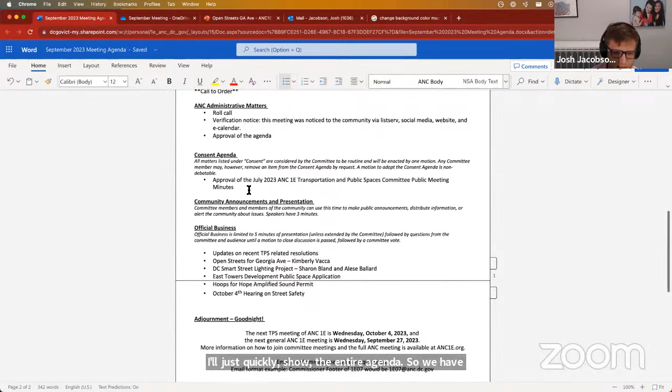I'll just quickly show the entire agenda. So we have the consent agenda for just the meeting minutes from July. Several items under official business around our past resolutions. A great presentation on open streets. We'll be learning more about the DC Smart Street Lighting Project, the East Towers Development Public Space application, and also Hoops for Hope amplified sound permits. And then if time allows, since we have a lot on the agenda, there's a street safety hearing on October 4th and we wanted to see about putting together testimony for that.

And then we are good to go. So I will make a motion with unanimous consent to adopt the agenda. If there's any dissent, please state so now. Otherwise, we'll just go ahead and approve it. Hearing no dissent, the motion is approved.

Next up is the consent agenda. Just a reminder that all matters listed under consent are considered by our committee to be routine and enacted in one motion. I will now make a motion with unanimous consent to adopt the consent agenda. Hearing no dissent, the motion is approved.

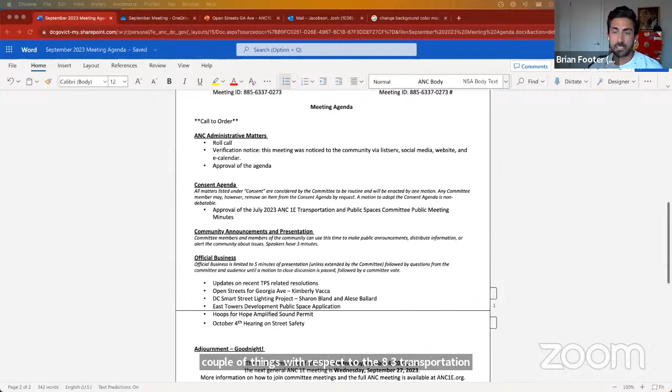Making some great movement and headway with DPW and DDOT. A couple of things we need to follow up on because there might have been a miscommunication on who has responsibility over it, specifically around picking up a couple pieces of illegal trash and placement of trash bins, but making good headway on turning 8th Street and Barry Place into a 3-way stop, and talking to the different developers about 1-way versus 2-way parking around the neighborhood with the 3 different buildings that are coming up.

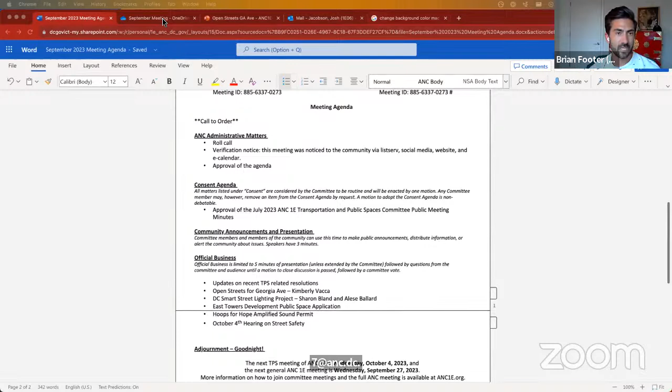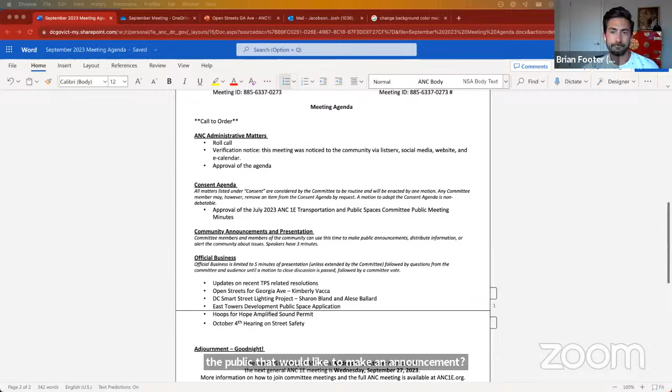Next up is official business. I will just briefly touch on our TPS related resolutions from our July meeting, and then we'll hear a presentation from Kimberly Vacca from DDOT.

Just really quick, the ANC passed the 2 resolutions that the TPS committee passed back in July. That was a resolution calling for a task force to boot and tow frequently speeding cars. That was passed, I think 7-0-0, so it was unanimous, or at least I don't remember the exact final vote count. And then the public space permits with our caveats for the Howard Lot 3 residential project also passed through the full ANC and was sent along to DDOT.

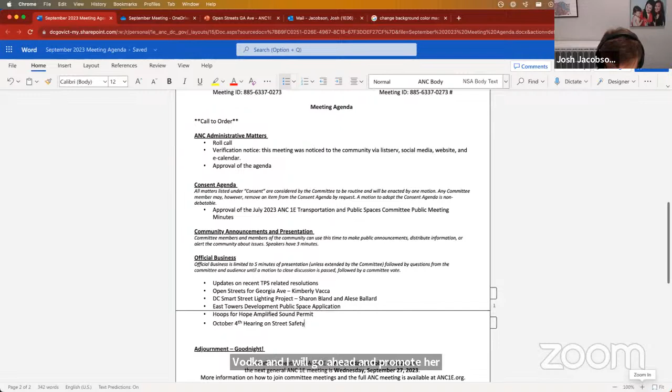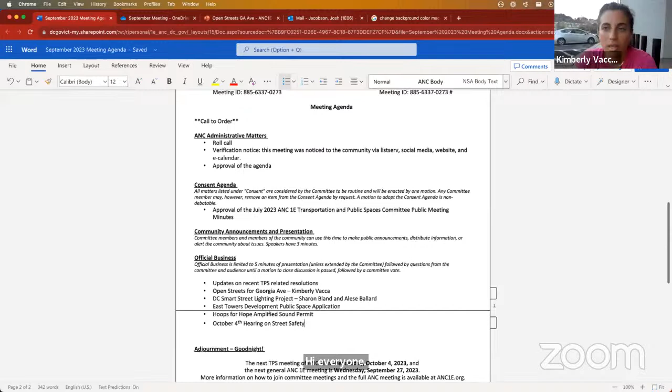Hi everyone. Hello, would you like me to share the presentation? I think you mentioned you might not have great Wi-Fi. I can actually do it. Oh cool, thank you so much, I was trying to be prepared just in case. I'm at a pickleball tournament, so I love being outdoors as Open Streets, it just spreads into my personal life too.

Okay, I'm going to share my screen because I have a quick presentation together for everyone. Can everyone see this? Great, okay, I have 5 minutes so I'm just going to breeze through everything.

This is not our first time coming to your community and neighborhood, but I know many people may not know what Open Streets is. I'm Kimberly Vacca, a transportation planner at the District Department of Transportation. I'm also our public space activation coordinator, so I do everything related to streeteries, parking day, parklets, but most importantly today, Open Streets. This year we've partnered with Nedium Consultants, our event planner who helps with all the event logistics of running an event such as Open Streets, which is very unique. They will be on the ground with us to facilitate all things Open Streets.

For those who may not know, this is not new to the world. It actually began in 1970 in Bogota, Colombia through Ciclovia, but we've brought it to DC and deemed it Open Streets. Essentially it seeks to reimagine streets to prioritize people over cars. So we close 3 miles of Georgia Avenue to vehicles and open it up to people to safely walk, bike, skate, scoot, learn about transportation safety from professionals at DDOT, WMATA, WABA, and participate in a range of fun and family-friendly activities, and also support local businesses on the route. Unlike an H Street Festival or an Adams Morgan Day, which brings in outside vendors, we do not allow that. We only allow businesses on the route to participate in Open Streets to help promote them to event attendees.

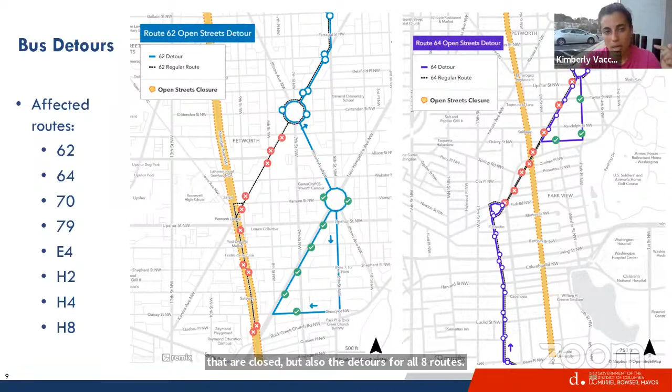On our website, which I'll show at the end, we have posted all of the affected bus routes. There are 8 routes that are affected, showing the stops that are closed, but also the detours for all 8 routes. You can go to the Georgia Avenue page and click on whichever bus route you're interested in learning more about. We also have our vehicle detours posted.

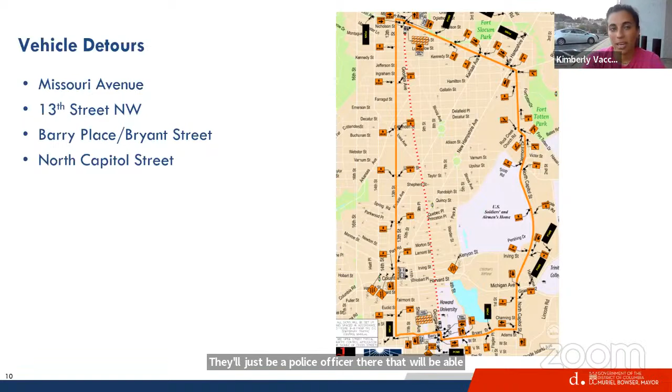This is the same as years before, where traffic will be diverted from Georgia to Missouri, 13th Street, Barry Place, and Bryant Street at the southern end, and then North Capitol Street to the east. Cars will not be able to cross Georgia Avenue at all at any section, so you have to go all the way around. But if you live in the blocks immediately adjacent to the route, you will be able to access your home. There'll just be a police officer there that will let you through. So please, if you're driving that day, note these detours and plan in advance. We also share this with Google, Waze, and Apple Maps and things like that, so they can integrate it into their systems.

Some expected programming you can expect to see this year are bike maintenance and safety riding lessons, live music with a go-go band, a pop-up pickleball court, Foamboree, which is a classic we started last year and has been a hit ever since, free fitness and yoga classes, roller skating lessons, arts and crafts, a kids zone at Bruce Monroe Park facilitated through DPR, hula hoop instructions, rest areas, and a whole lot more. We have a major announcement coming this year for programming that is expected to be released next week.

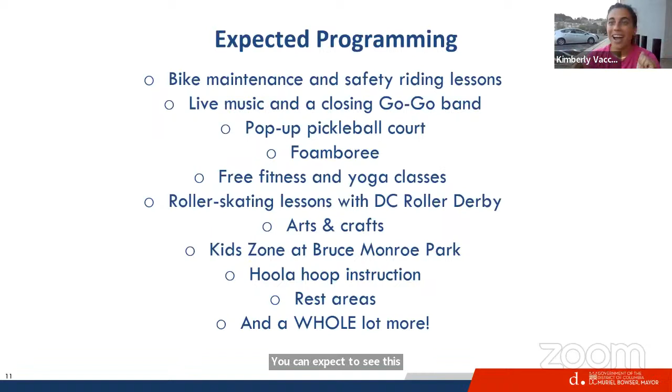I will send it out to all the ANCs once it's live, but I'm really excited about this announcement. It's going to be something we've never done before, so just want to pique your interest a little bit. If you have any questions, feel free to reach out to me directly or to our email at openstreets@dc.gov. All information about the event will be posted to our website, www.openstreets.dc.gov. That's it, thank you so much.

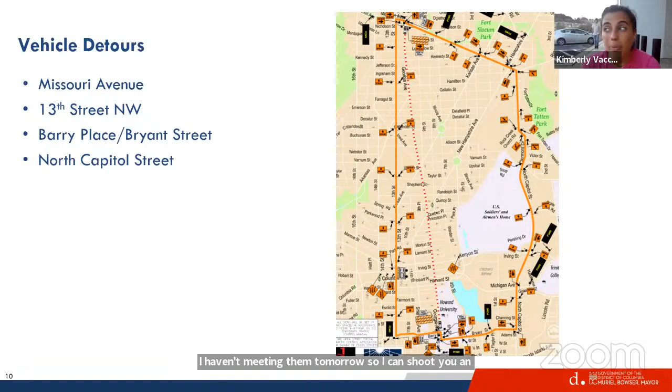Great question. I believe they typically just say that they live there, and MPD usually lets them through. They might just ask, what's your address, and provide it. I honestly don't know, but I can follow up with MPD. I have a meeting with them tomorrow, so I can shoot you an email to confirm. We've never had a problem with that in the past, but I can get the details.

Awesome, and then the cleanup plans for after the event? Yes, we have volunteers coming to help us clear everything out of the roadway. We also have DPW scheduled for street cleaning services after. They come before the event to clear all the trash and clean the streets, and then they come after to do the same. Awesome, that's it, thank you. Thank you.

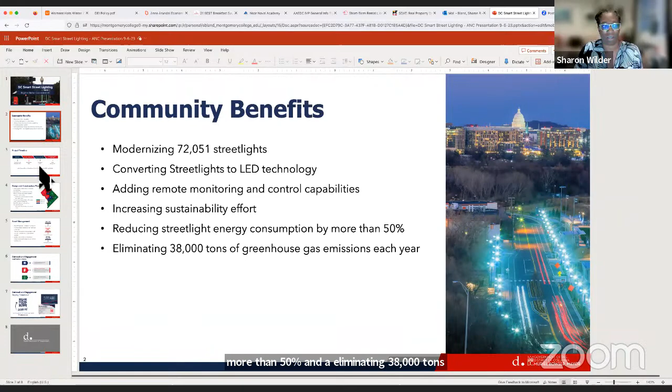Our project timeline: we started rehab work in the first quarter of this year, then moved into conversion work. Rehab is making sure the poles and everything are able to sustain the lights that we then convert, and we've been doing conversion work ever since.

We also at the same time launched our asset management, where we get the call to replace lights, what have you, and manage that asset.

In our design and construction phase, as you can see, we started with group 1, which was wards 5, 7, and 8. We are working on the next phases of our work upcoming. Our tasks include detailed design, procurement, and mobilization.

Our rehab work, as I mentioned earlier, is sporadic work to upgrade foundations, poles, and make sure the arms are in good condition. This will also happen sequentially per groups of wards.

Our conversion work, which is the actual installation of the lights, occurs per groups of wards, and then they are split per ANC, which is why we wanted to make sure we spoke with each single ANC single member district. Each ANC is split into bundles, with less than 5 bundles per ANC, and work within a bundle will not last more than 14 days. We're going to be in, we're going to be out.

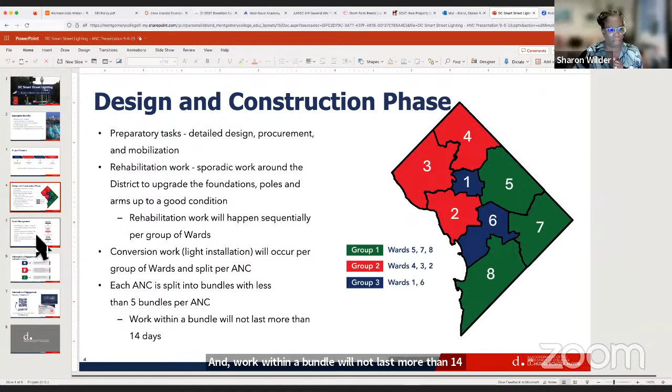With regard to our asset management, it's basically streetlight maintenance. That preliminary asset management service began last fall, and the full asset management service began in the first quarter of 2023. We'll continue as LED lights become available. By May, we're expecting all new LED lights to be installed, and then we'll continue with the asset management portion of this work.

Outreach and engagement has been that we notify each ANC by mail, by email, 45 days prior to the start of work. Then 7 days prior, we make sure we leave door hangers for residents, and information cards with businesses providing notice of upcoming work and advising of no emergency, no parking. This will include a range of durations for the work on these materials.

So we'll say it'll be 3 days we expect to work, or a week or 14 days. And then 72 hours prior to the start of work, we'll be hanging those emergency no parking signs.

So how do you stay connected? Well, you can scan here to view our website and to view the project FAQs. We do have our own website, streetlights.dc.gov. There are places to plug in if you're media, or just if you want to receive project updates. And certainly connect with us on Facebook and Instagram.

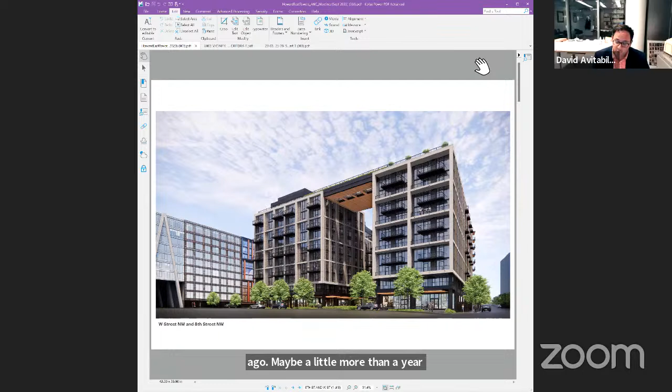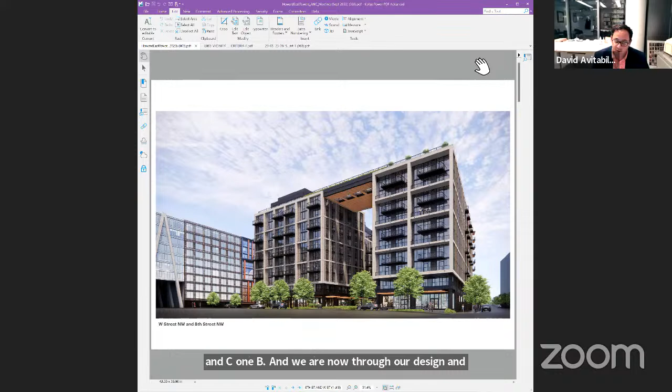We are now through our design and going in for our public space permits, so we wanted to share an update on the design and some specific features of the public realm that we're proposing.

So this is a shot of the building from the south looking north. It is primarily an apartment building with about 504 units, 10 stories plus a habitable penthouse. There's also about 15,000 square feet of retail on the ground floor, and it has underground parking and bike parking.

You will see how the circulation works around the site in some of the subsequent slides. I won't try to play architect and present the design, but I'll just briefly flip through a couple of images to give everyone a sense of what the building is on all four sides. So this is the south, looking north along W Street up towards the building.

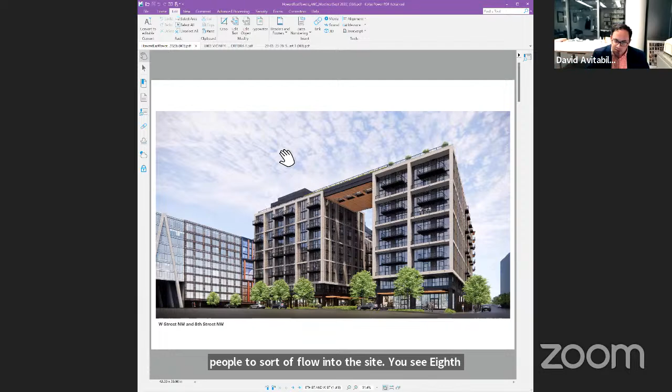You can see this is really the front of the building. There's a large courtyard that's created, and you'll see that in the site plans as well, that takes the property from W Street and allows people to flow into the site. You see 8th Street running up on the east side, and 9th Street running up on the west side of the building.

This is a view from the other side of W Street. You're now standing on 9th Street looking northeast, and again this gives you a sense of the building and how it sits relative to the surrounding buildings.

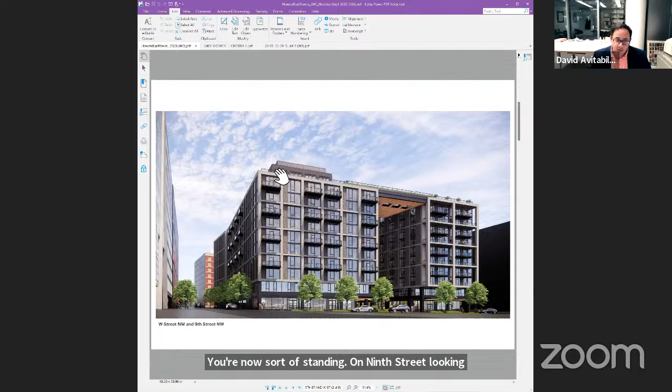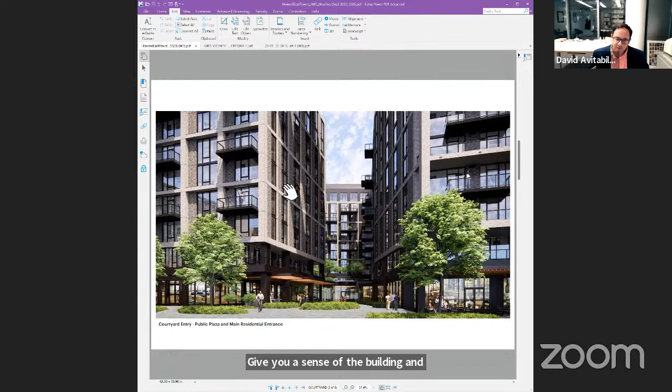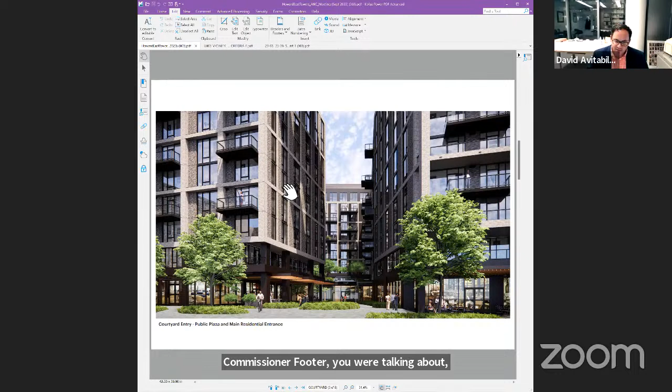Here's a view standing inside on W Street looking north directly into that courtyard to give you a sense of the building, and as you'll see in the site plans, they give a better sense of it. What we really tried to do is take this one block of W Street that Commissioner Footer, you were talking about just before on the streetlights, and make it a moment inside of this block and a little bit of a place of respite.

Here's a view from the north looking down 8th Street at the northeast corner of the building looking south. This gives you a sense of how the building fits up against the existing East Towers Residence Hall and how it ties into the overall feel and cadence of 8th Street going southward.

So here's a site plan of the building, and it gives you a sense of our overall orientation: W Street on the south, 9th Street on the west, 8th Street on the east, and Bryant Street on the north. I wanted to note a couple of things here, all of which show the ways in which this building and development is trying to really enhance the public realm. The first is you see along the south, the building itself is set back somewhat significantly from the sidewalk and the property line along W Street.

There's this building restriction line that was created to really make sure that there's this width inside the center of this large block of properties around us, so that there's open space created that we're able to populate with a mix of planting and plaza to enhance the public realm.

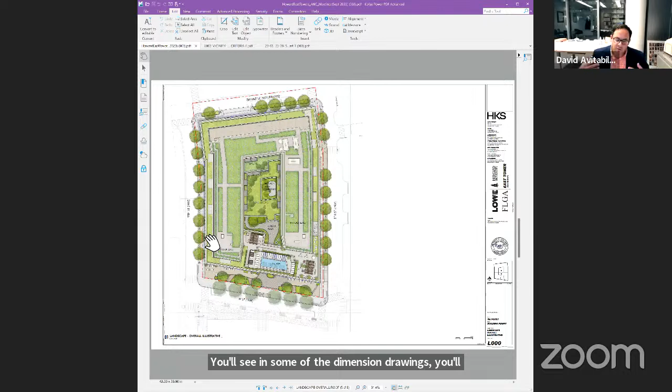You can also see on both 9th Street and 8th Street, our west and east sides, the buildings pulled back from the red dashed property line. We voluntarily set back the building a few feet, which allows us to create wider sidewalks with street trees. You'll see in the dimension drawings typical 5-foot tree boxes and 8-foot wide clear sidewalks.

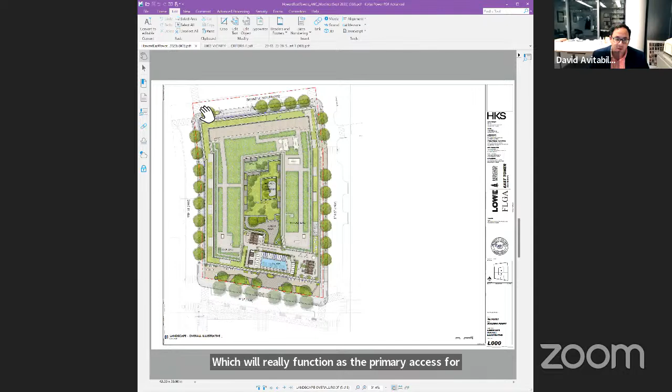So we're deliberately creating a more engaging public realm around the site and a more comfortable realm for pedestrians. On the north side, we're creating this new segment of Bryant Street that'll extend 1 block further east from where it is now, which will function as the primary access for loading and service to the building, but also provide a connection between 8th and 9th Street. I think that's important.

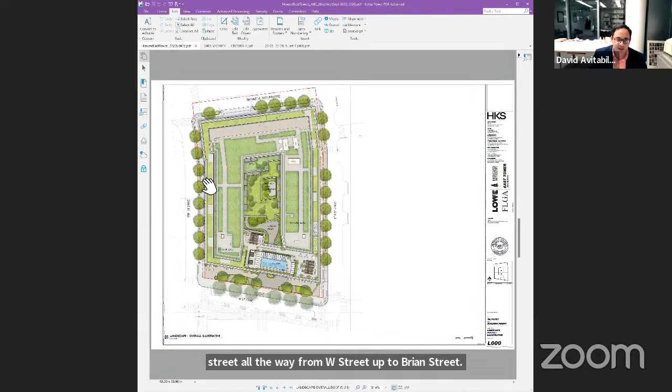One other thing I wanted to note regarding 9th Street: right now our lot actually includes the northern half of this block of 9th Street. When we closed the alley, we gave back the land that is currently that northern portion of 9th Street. So 9th Street will become a full, city-owned, dedicated and accepted public street all the way from W Street up to Bryant Street. We actually ended up giving more land than we were getting through the alley closing.

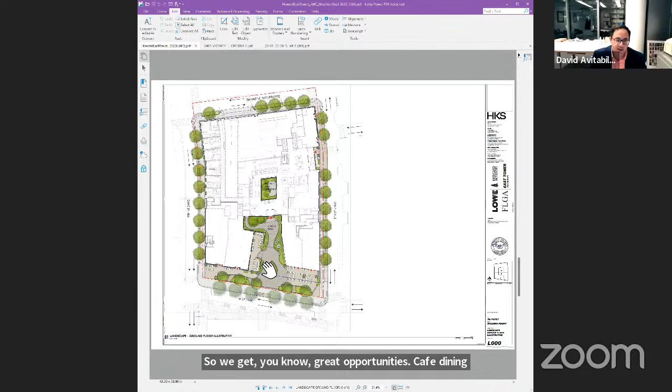The primary retail spaces are concentrated to the south along W Street, so we get great opportunities for cafe dining and seating, both within that building restriction area and on our private property. You see again the setbacks to widen the sidewalks on both sides as well here.

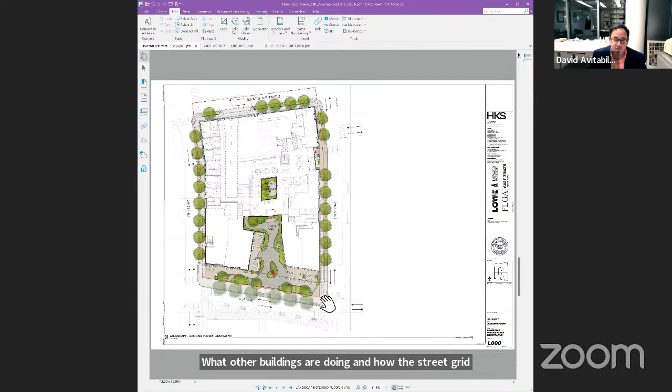We've also included here what we know from our surrounding development, what other buildings are doing and how the street grid will work. So you see Bryant Street's 2-way, 8th Street is 2-way, W Street's 2-way, 9th Street is 1-way southbound. You can also see, and I think we took this in part from coordination with the other teams, where the anticipated parking areas are contemplated on the east side of 8th Street.

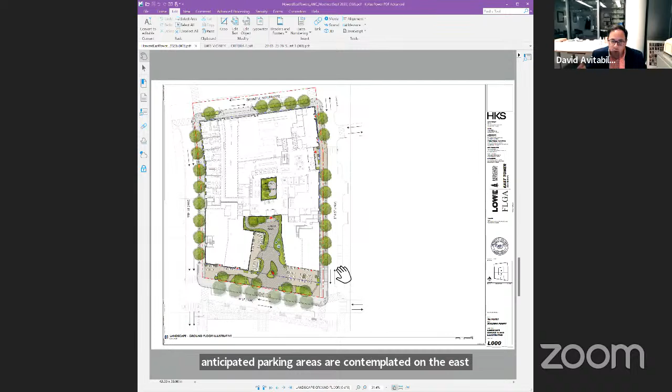Both 8th and 9th Streets are really narrow rights of way, so there's very limited space to create room for vehicles and parking and wide sidewalks and everything else we want to see. These aren't like downtown rights of way where you have 90 feet to work with. We've got 40 or 50 feet, but between setting back our building and being strategic about what happens where, we can balance the interests around the site.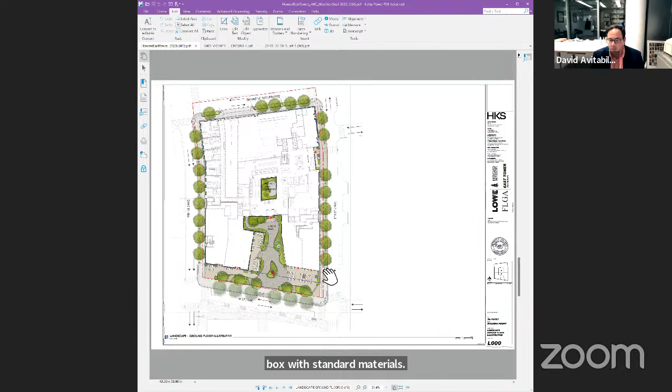For the most part, this public space is pretty standard DDOT fare, standard widths, standard tree box widths, standard materials. But there is one area where we're deviating from the strict requirements, and one of our asks is for approval of this. This is actually for the balconies on the building that project out.

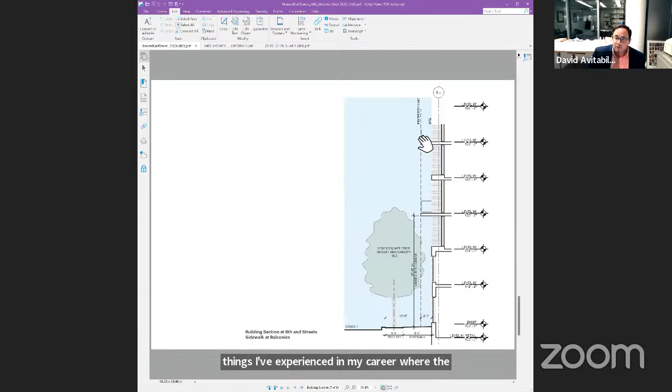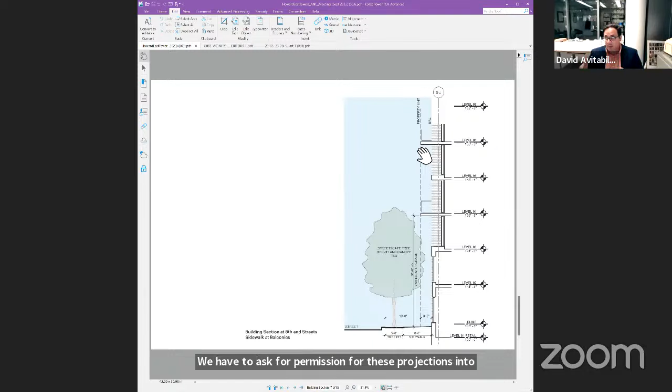This is one of the odder things I've experienced in my career, where the balconies are located fully within our private property. They only come out to the property line, about 3 feet projecting from the building. But because we agreed as part of that voluntary sidewalk setback to treat this area as if it's public space, we have to ask for permission for these projections, because you wouldn't ordinarily be allowed to have a balcony projecting onto a narrow right of way like this.

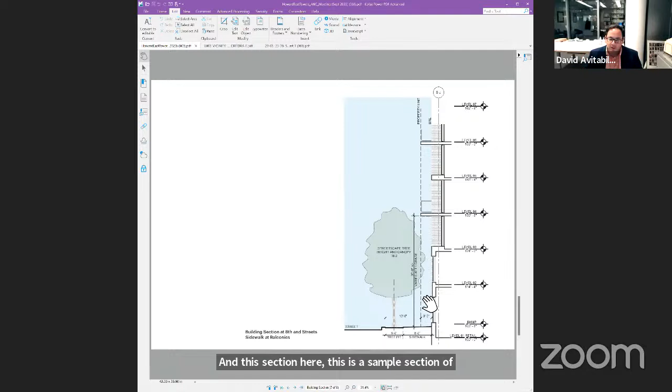We've worked closely with DDOT and the Office of Planning to plan how these would work. This section here, a sample section of 8th Street, gives you a sense of how this works and doesn't interfere with the public realm. We don't start the balconies until the 4th floor, so they're quite high above the sidewalk, and even pretty high above the anticipated tree canopy height of the nearby streets, and they're set back as well from those trees.

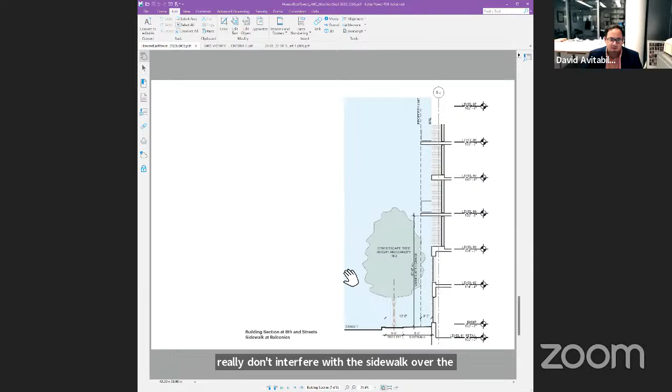The rest of it we expect will be relatively standard. Sort of wrap it up. We haven't yet filed our public space application. We anticipate doing that in the near future, but we thought it made sense to come to you all now to start the presentation and start discussing this with you all and get whatever feedback. So with that, I don't know if Lex or Fred have anything to add, but otherwise we'll stop here.

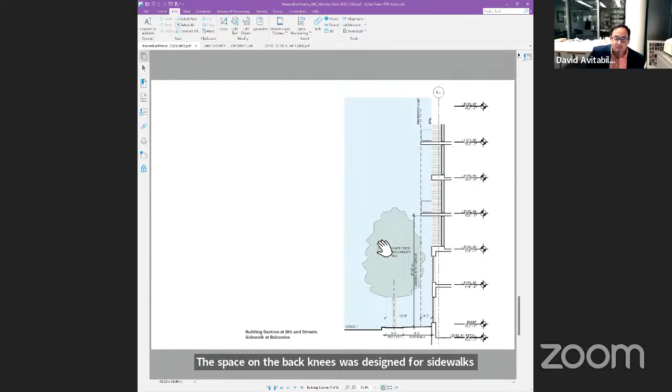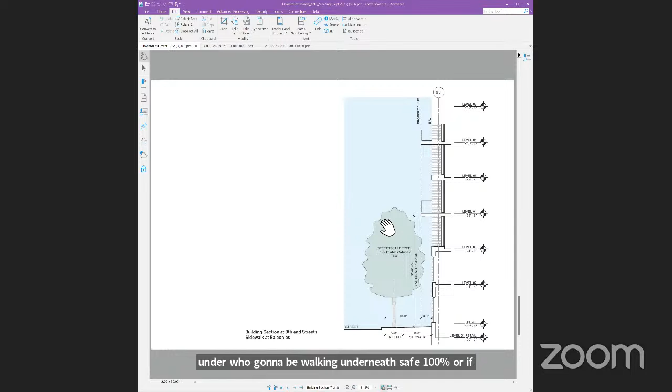Commissioner Lancaster, did you have a question? Yes, I just wasn't sure if I was good to go. My question is about the balconies. The space underneath the balconies was designed for sidewalks and people to walk, correct? Yes. Is there any policy or anything put in place to protect people who are walking under those balconies in case something falls or something happens in that area? Are the people who are going to be walking underneath safe 100%? Or if someone accidentally throws something over or something falls, what does that look like as far as policy and procedure?

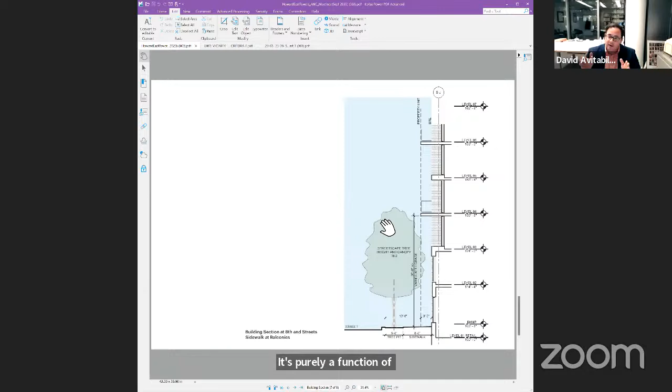So maybe I'll take a step back. Typically, you can have balconies projecting over a sidewalk. They're allowed in most situations, and you'll see them all over the city. In fact, on our W Street side of our building, we have them, and it's totally permitted by right. The only reason why we need to have a special ask here for the balconies is not related to the fact that they're projecting over the sidewalk or how high or low they are relative to the sidewalk. It's purely a function of when you have rights of way narrower than 60 feet, the default rules typically don't allow projections into the public right of way, because it's presumed that you might get too close to something like street trees.

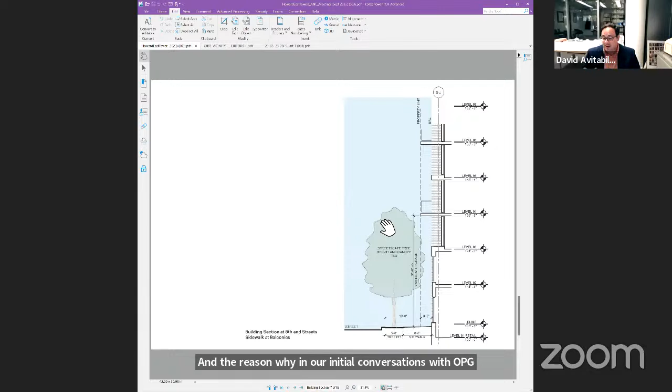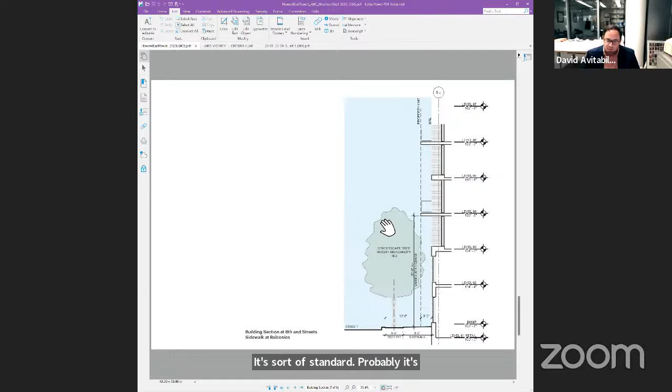The reason why in our initial conversations with OP and DDOT, they've said this appears to be fine here is because basically by voluntarily setting back the building, we've created that separation that they want to see. In terms of general rules and regulations around protection from what might fall from a balcony, it's sort of standard common law rules over what happens in terms of an act of potential negligence. But this is no different than any other balcony over any other sidewalk in the rest of the city in that context.

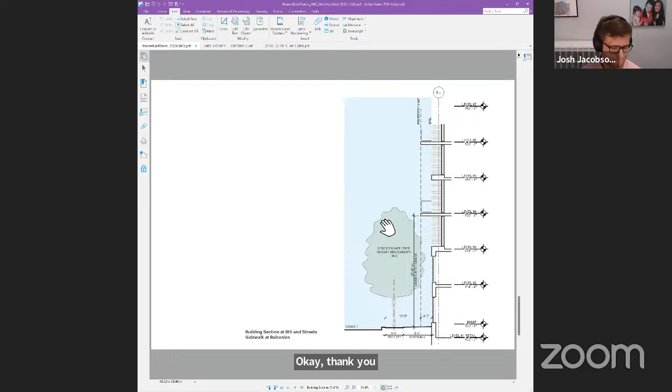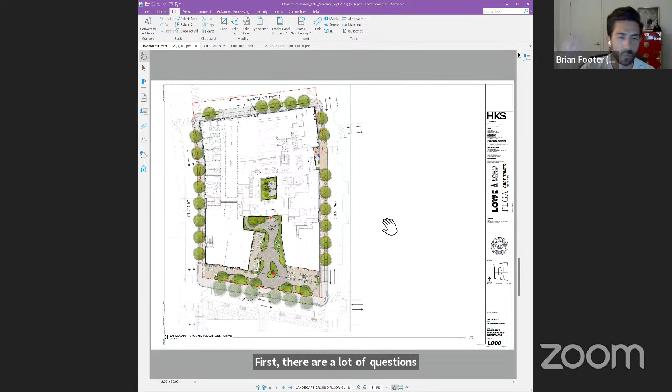First, there are a lot of questions from members of my community and my constituency about when this is going to start. So do you have a projection on when construction or breaking ground will start on the east lot, on this property itself? I'll look to Lex or Fred to answer that question if they've jumped up.

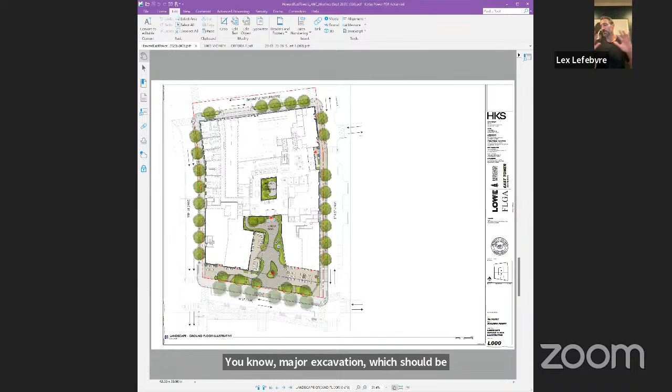Yeah, hey everyone, this is Lex. Sorry I was late, can you all hear me? Sorry, having some technical difficulties here. Right now we are targeting a mid to late January groundbreaking. I do want to note one wrinkle in that would be construction on major excavation, which would really be the start of having the site fully fenced off with construction entrances for excavating for the below grade parking. There is an early stage of work that you hopefully will see starting in October.

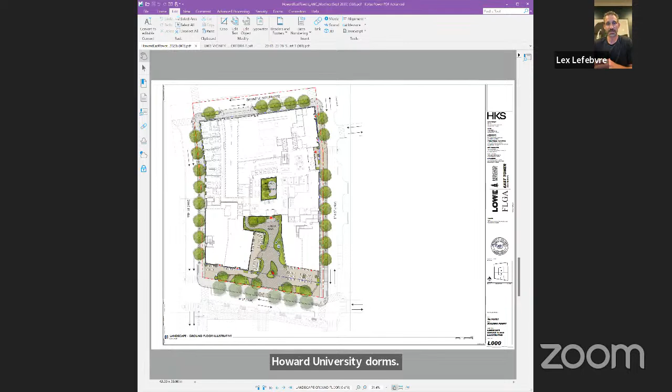That's going to be very limited to the north part of the site, up adjacent to the Howard University dorms. There are a couple of existing transformers you'll see on 8th Street right near the dorm parking garage entrance. Those two transformers power the dorms, and they have to be replaced and moved onto dorm property.

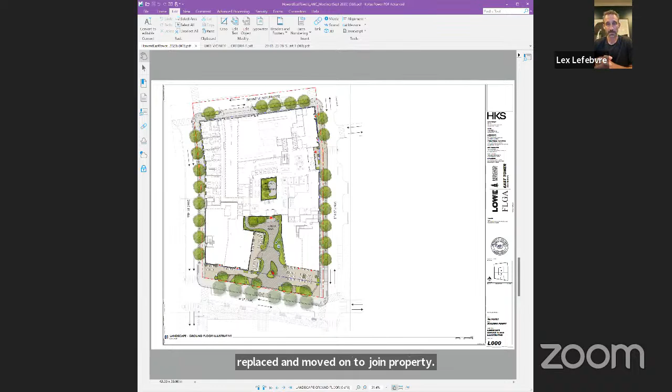That work we're going to be starting hopefully in October, so you'll see some mobilization there. They'll be digging some trenches for new conduits. That will be pretty minor. The real work should start in January.

Awesome. And how long roughly will it take, and I guess what does that look like? Is it deep drilling? Will it be weeks of drilling? What does it entail to move transformers?

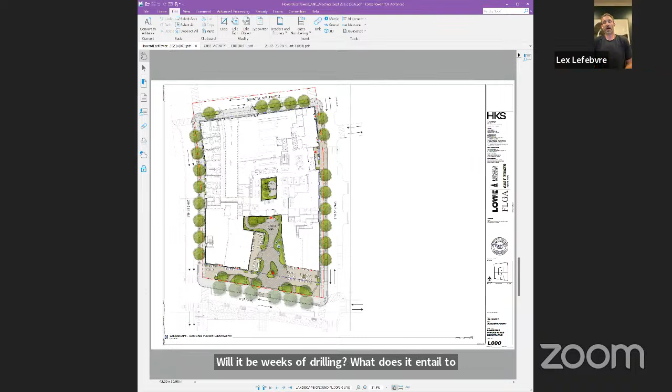No, that will be pretty minor. The trenches that we need for the new conduit are not that deep. That's probably just like bulldozer and backhoe. That's going to be, again, pretty superficial work. The real digging, to get down for a 2-level below grade parking structure, that won't happen until January.

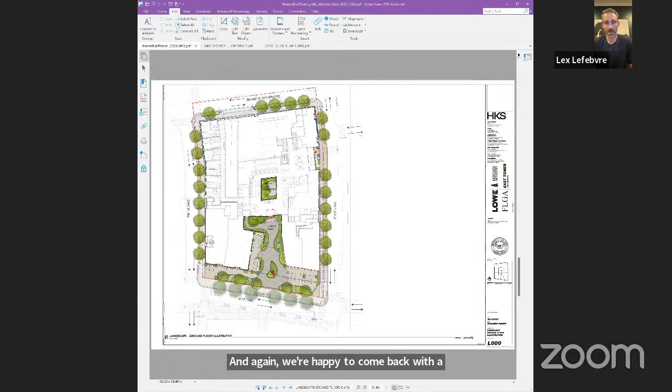And again, we're happy to come back with a full construction site utilization plan, showing how trucks will be accessing the site and all that stuff once we finalize that.

Yeah, that would be greatly appreciated. I speak for our building who's going to be directly impacted, and I'm looking at the transformers right now as you talk about it. There was very little communication from the reverb that had just finished right next door to us, and so there's still a lot of confusion and fear within our building of how much we're going to be impacted by the drilling and when it's going to happen.

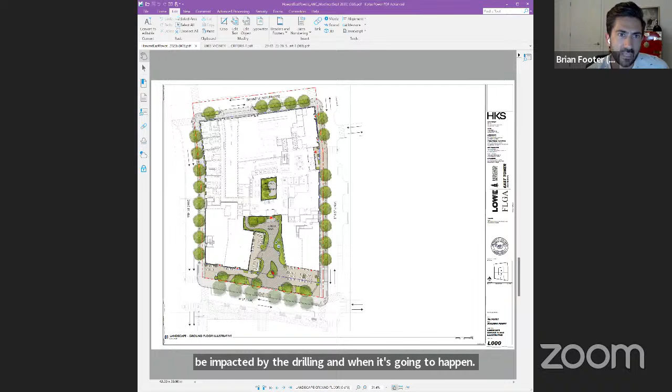I would love to talk to you guys about hours and when it's going to happen. I think the big concern was that it was happening extremely early in the morning, and for people working from home, it was extremely disruptive. I'd love to talk about potentially pushing the start time, like an 8 a.m. start instead of 7, and tacking on a little later. I'm not completely familiar with the rules around that, but I'd love to chat with you guys about it.

Roughly how much time in advance of actually doing that do you guys need to submit your construction permits? Is that the correct way to say it?

Yeah, so we have already submitted for the foundation to grade permit, which is the permit that allows us to dig and then come back up to grade with the parking structure. So that's in, and we're looking to pull that the first week of January.

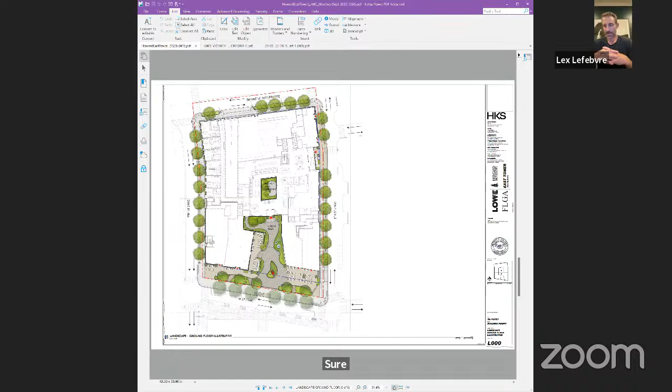Okay, so maybe we could follow up and have a conversation just about what the timing is. And thank you for offering to come back and talk to us about the construction plans, because that would be great. Sure, we would very much welcome that. And we will make sure that we are ready to address work hours when we come back for the site utilization discussion.

Awesome. David, it looked like you were going to jump in there. Did you have something you wanted to add? No, I don't. Oh, okay.

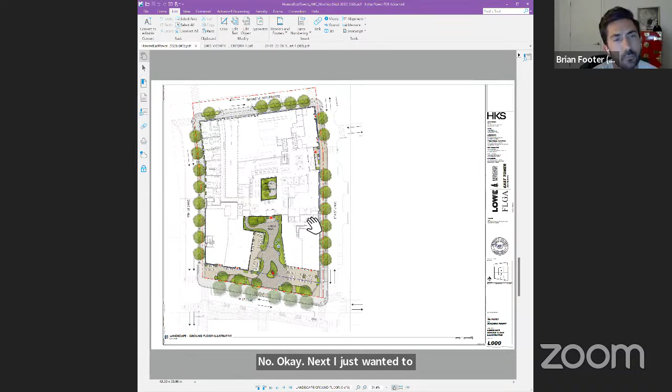Next, I just wanted to ask about the sidewalk width. Can I actually present my screen for just a moment? Absolutely, let me stop. All right, can you see?

Yep, gotcha now. So when we talked to your colleagues who are doing the other lot across the street, one of the big things I was talking about was trying to turn 8th Street into a one-way. They came back with a really great plan. We had a lot of conversation about the benefits of maintaining a two-way street, but we were taking away a row of parking, and they were talking about expanding the sidewalks. As I was looking at your plan, I couldn't see the measurements they had proposed.

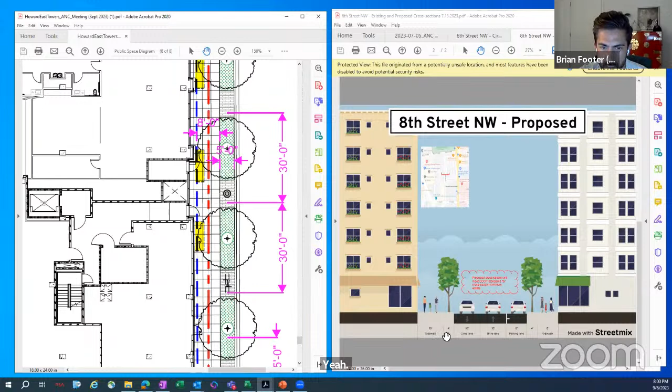Have you guys had any conversation with, I believe you said he was the same person working on all 3 developments? I forget his name, I want to say maybe Robert. Is it one of the folks at Gorove Slade, either Rob Schiesel or... Yeah, that would make sense, who was doing specifically the transportation piece of it. So does this need to be updated, the presentation you guys provided on the left, in order to show this 10 foot and 4 foot kind of measurements?

Or am I looking at it incorrectly? So they might be doing something slightly different on their side of the street in terms of the sidewalk width and tree box width versus what we're doing. So this is our side of 8th Street, the west side, and they would be the east side, right?

Yeah, and the way he said it was, this is their side, this is your side. So this is what they gave us in their presentation. He was saying this would be their side, 8 and 4, and then this is your side, 10 and 4. Oh, interesting. Well, this is the first I'm at least hearing about this.

Yeah, this is the section that we've developed with DDOT, and had it in place for over a year now. It's sort of an 8-foot sidewalk and 5-foot tree pit. We had some back and forth with DDOT over exactly how wide the sidewalk should be. Should they be narrower? Should they be wider? Should the tree pits be 4 feet, 5 feet, or 6 feet?

Ultimately, this is what DDOT actually said to us, that's what we want to see on this block. Slightly wider tree boxes at 5 feet, and then they felt an 8-foot sidewalk, especially on these north-south streets, was sufficient given the volume of pedestrians expected. That's pretty standard for DDOT on a secondary street versus a primary street. And also those widths were only achieved because we set back the building.

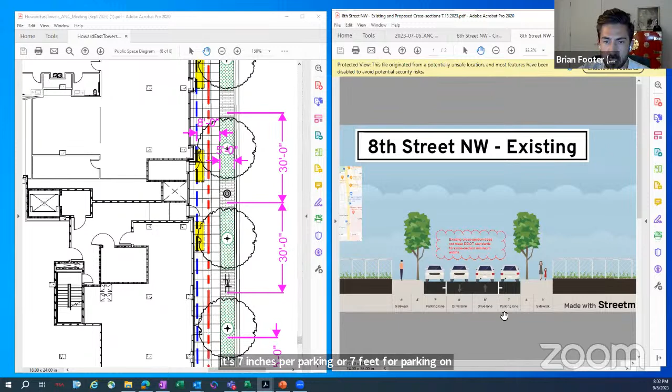And my key takeaway is, thank you. We absolutely appreciate that you guys are expanding the sidewalk. That's kind of the goal in me talking to them about this. The agreement that we had kind of come to was that if this is the current structure right now, where it's 7 feet for parking on either side, and 8 feet for two-way traffic, as you mentioned in your opening remarks, the streets are very narrow.

And so if we got rid of one row of parking, it would provide an opportunity to expand by 2 feet, 2 feet, and 2 feet, and then still also provide additional space for sidewalks. That's what we really wanted to do. We want to make sure that it's accessible to a variety of people, including people who may have mobility issues, safety issues.

We love the idea of having trees and canopies in this neighborhood. As you guys have seen in your walks, it's kind of a concrete jungle, so greenery is definitely a priority. So I bring this up, you have our support in expanding sidewalks and what you can do to bring tree boxes. So if there's anything we can do to help with that conversation, you have it.

That's very helpful. And I think looking at this and doing a little math in my head, I think maybe the discrepancy is simply that they may have thought this dimension they have is 54 feet total, and it's a 50-foot right of way. So it could just simply be that they didn't appreciate that our setback was 3 feet versus 4 feet. And so that, combined with the allocation of sidewalk to tree boxes, is probably the discrepancy.

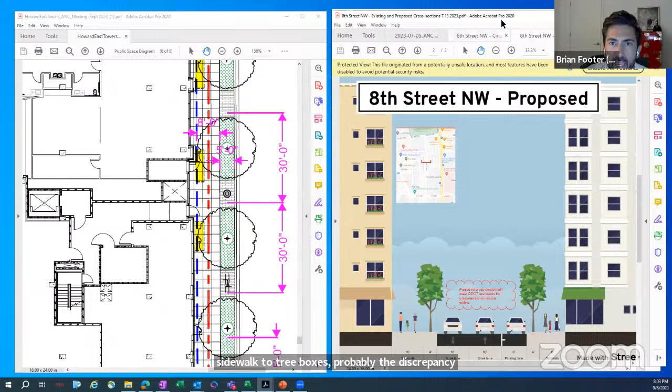Gotcha. And then speaking of the tree boxes, they had in their plan, they were talking about having fences around their tree boxes. We had kind of pushed back on that a little bit because from our understanding from DDOT, if developers put in fences around tree boxes, that's fine, but they will not maintain them. And so they become these rusty, broken fences around trees over time. So wanted to ask you guys, I can't tell from this design if that was something you guys were anticipating or proposing. Do you have any thoughts or ideas on that?

Do you know if the design includes tree box grates? My understanding, and it's something we've debated internally and mentioned to the city, is that they prefer open tree pits. The way they're done now, they're sunken, and when you're stepping out of your car, you've got this open depression that's tricky to navigate. We would rather have some kind of grate around it, but for whatever reason DDOT does not like that condition. So as far as I know, we are not planning on doing any kind of fence around the tree box.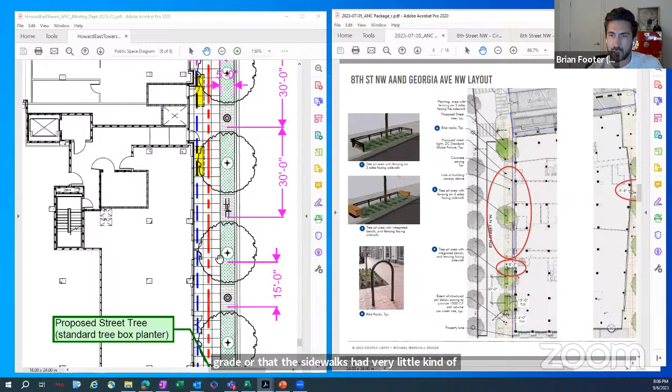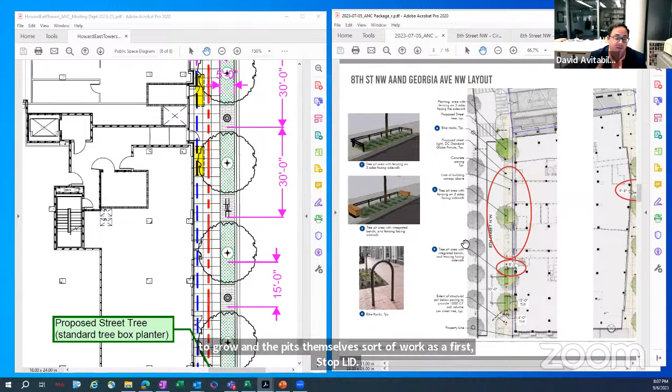Sure, go ahead Dave. Okay, so in general we're going to use the same features proposed on the other side of the street, since they're all DDOT's best practices — things like structural soil, especially extending beyond the tree box pit itself to allow ample room for roots to grow, with the pits working as a first stop LID system. Ours are a bit wider, 5 feet versus 4 feet, which increases the permeability.

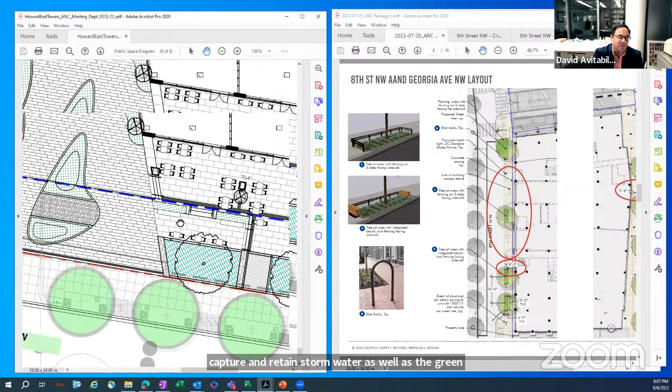The other key piece is the W Street design, the building restriction area, and the amount of green space planted there, which creates additional areas to capture and retain stormwater, as does the green space within our courtyard. If you look at the ground floor plan with the roof version, you can see green space at about every level, from the roof down through the various courtyard layers. So there's a lot of pervious surface created here, both in absolute terms and compared to the existing totally impervious parking lot. This will be a really meaningful and positive change from that perspective.

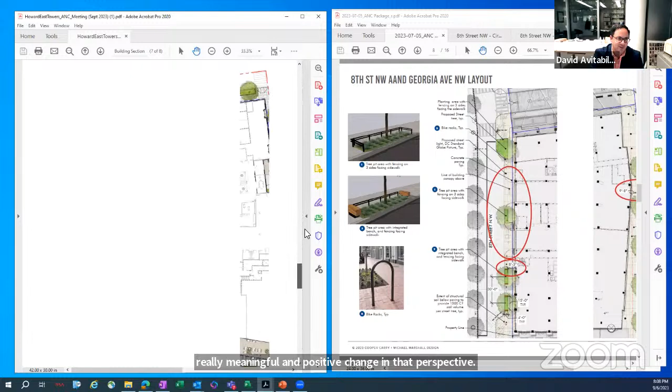I won't get into the details of sidewalk grading, other than it's going to be typical standard cross slopes with a slight slope away from the building toward the tree boxes and the curb and gutter, which again are DDOT standard.

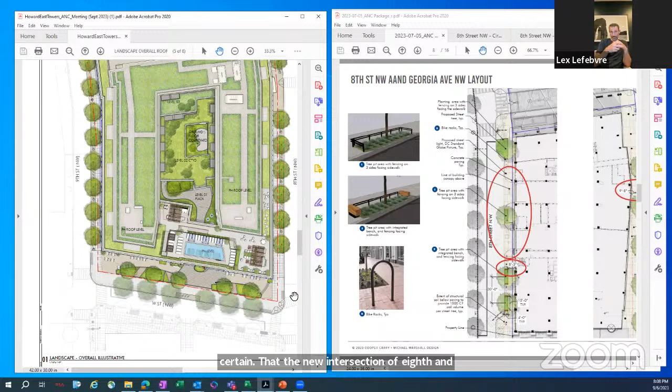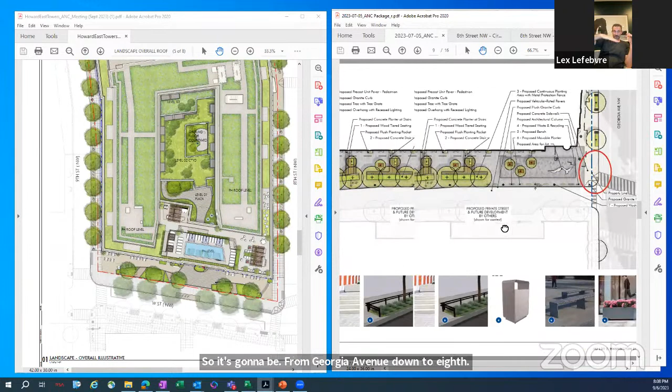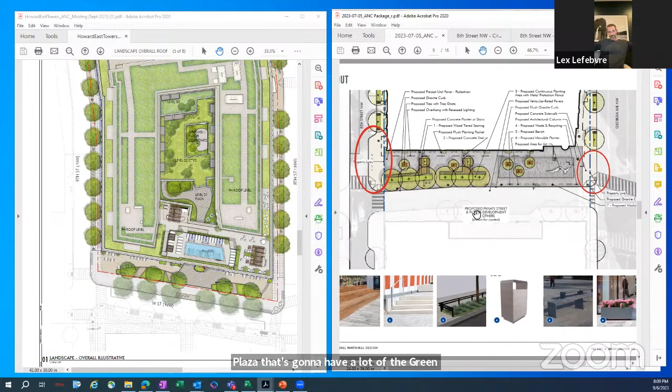Dave, I can add to that — I'm fairly certain the new intersection of 8th and W is the low point, so it slopes down from Lot 3 toward Georgia Avenue. There's that big wall on the Lot 3 side, so a lot of grade has to get made up from Georgia Avenue down to 8th, stepping down. Their plaza steps down too, with similar green area conditions. So you have this 2-block long, 25-foot wide plaza with a lot of the green areas Dave referenced, and from a grade standpoint it all converges at 8th and W.

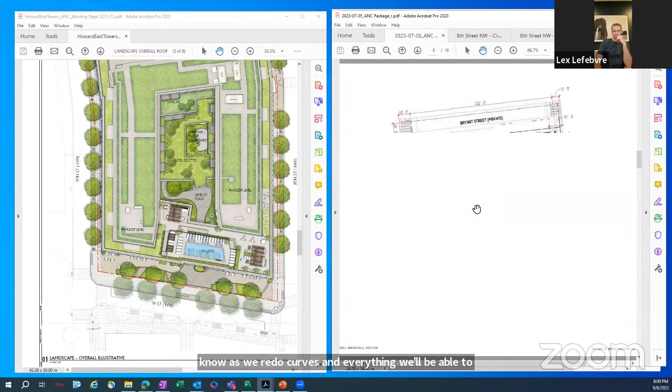There's all this green area to catch water as it comes down the hills, and as we redo curbs and everything we'll be able to address water collection. It's just a far improved condition compared to what's there now, which is all impervious.

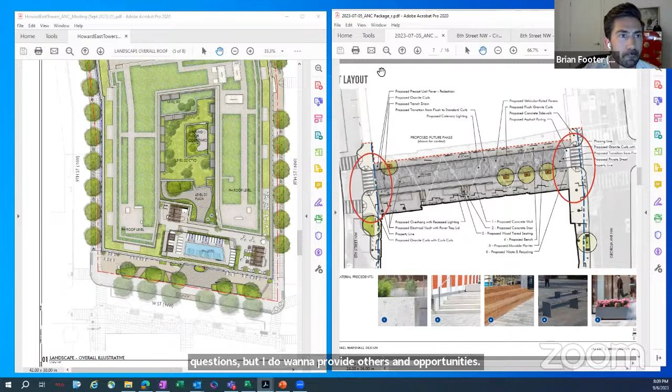I'll stop there — I have two more questions, but I want to give others an opportunity, so I'll kick it over to Commissioner Jacobson. Thanks for all your great questions, Commissioner Footer.

Couple of quick ones — I've had a lot of near misses going south on 9th from folks speeding out of the Whole Foods parking lot and turning right onto 9th. Has there been any thought to adding raised crosswalks in that area? I think it would do a lot to help slow down some of the traffic.

That's a good question, and your colleagues over in ANC 1B have asked a similar question about raised crosswalks. I don't know if you all share a similar mind or are getting at something. I do talk to them a lot, but we haven't discussed raised crosswalks specifically. We do all love raised crosswalks though, so it doesn't surprise me.

So they've added that as well, and I think our team is looking at it in a couple of different places. It's always a bit of a challenge because DDOT has requirements around them and when they can and can't be added, but we're certainly looking at it. Another thing we'll look at, through DDOT's manual on uniform traffic control devices, is signage that might come in with our project to further clarify for people leaving that garage which direction they should be turning.

Lex, have there been any further discussions or detail on that? No, not that I'm aware of. No.